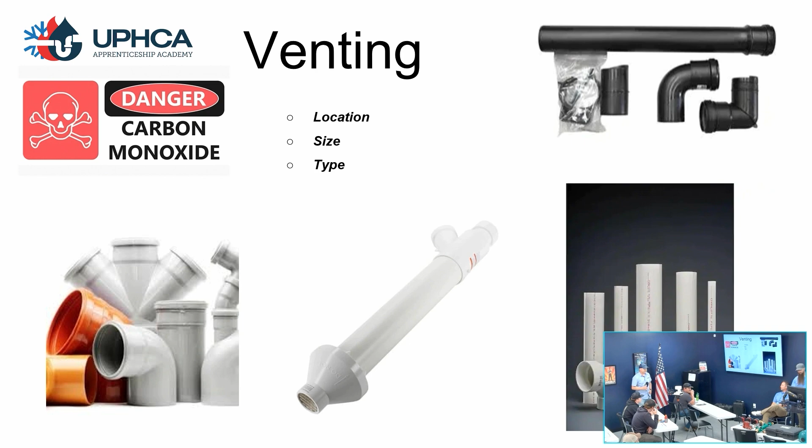Why are we venting? Show of hands. Why would we vent a boiler or furnace? Some guys in here do furnaces, right? Why do we have to vent our boilers or furnaces? Who's got it? Come on. What are we venting? Carbon monoxide. Okay. Get it out of the house. Is that good or bad? Bad. All right. So the main reason, yes, we got to get all the bad byproducts of what we're burning out of the house, right?

There's quite a few stories in the news all over the country of people passing away because of improper venting, or somebody screwed up, a fitting came apart. Somebody could have drilled through it. Somebody cut it, didn't put it back together, right? All sorts of different stuff. So people can pass away. You can cause a lot of stuff, right?

Okay. So now, where do we terminate our venting at? Because this is one I see a lot of the times that guys kind of screw up. So where do you want to usually terminate your venting at? What do you think? Use the roof if possible. Okay. Roof is the best place to go, right? Get it up and out. Most houses have chimneys on them, right? Most buildings, you get flat roofs, you want to put them up out through the roof, right?

Okay, so we're going to talk about the carbon monoxide then. Carbon monoxide is a bad byproduct of anything that's combustible. Anybody want to go sit in your garage with the car running? If you do, we're going to talk after class. We'll help you out, right? But same concept, right? You can do it with a car because you've got a combustion engine. You're creating byproducts. You're creating the carbon monoxide. You're going to hurt somebody or hurt yourself, right?

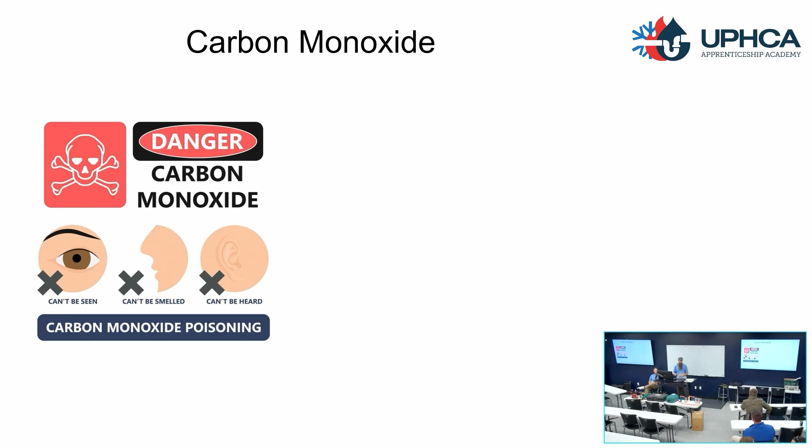So what is carbon monoxide? It's often confused with CO2, carbon dioxide, right? But it's created from incomplete combustion. Do you think our boilers can get complete combustion? Think we can get 100% out of a gas appliance? Looking around? No. Shaking some heads? No. Even though our boilers say 92%, 94, 96, whatever they say on the little tag there, we're really never going to be able to get to 100% combustion as of what we know today. So you're always going to have some sort of byproduct, something bad coming out of that combustion process, okay?

And there's a lot of different things with the condensing boilers we have today that we got to watch for, because you're always getting byproducts, right? So on the bottom of our condensing boilers, we got the P-trap that catches all of the stuff coming out of the bottom of the boiler. You ever looked at one of those traps and they're black or brown or full of stuff, right? So we're getting dust, we're getting soot from the combustible materials. You're getting the byproducts of your flue gases, and you get that condensation. Condensation is acidic, so that causes other problems that we got to deal with, right?

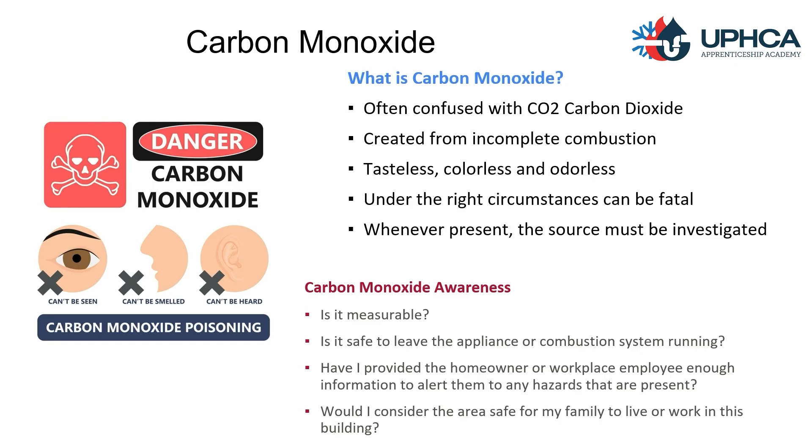Okay? All right. So obviously carbon monoxide is tasteless, it's colorless, it's odorless, right? You can't smell it, but you can feel it if you're aware of what you're feeling, right? Okay, because it will make you nauseous, it could make you lightheaded, might cause some issues that way. So small doses, it can create some issues. Okay, it can make you feel sick, give you headaches, make you nauseous, make you breathless.

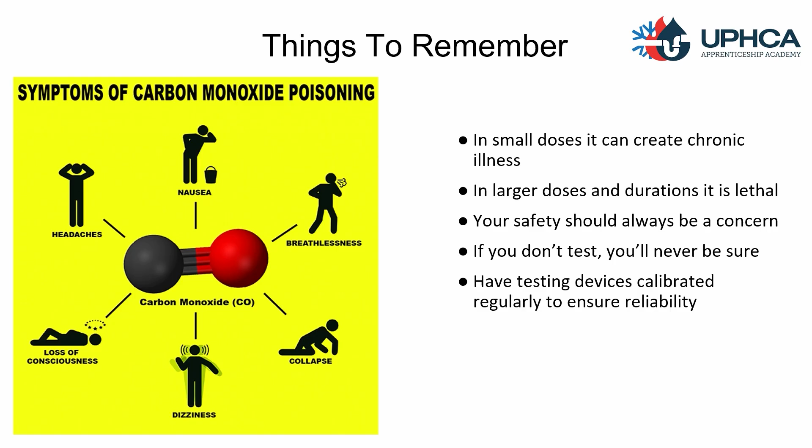But if you get long exposure to it, we all know that it could be bad. Again, if you have some symptoms, we'll talk after class, right? Okay, but it could eventually cause death, right? Can hurt somebody. So here's a chart that just kind of shows you different parts per million is how they measure it. Anybody in here have a CO detector?

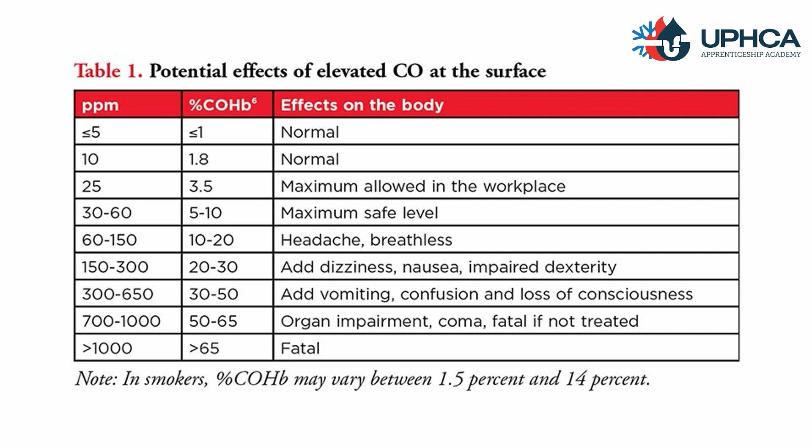Anybody use those? Okay. I got one of mine. Same thing, I got a pocket one, and then I have, who's familiar with a combustion analyzer? By show of hands, who knows those words? Okay, no? Combustion analyzer? Ever heard of that? A little bit? Okay, no? All right, we're going to talk about those too, because if you're going to be doing boilers, you kind of need a combustion analyzer. And again, another product that these guys have, and they offer a really good line of those type of products. So CO detectors, combustion analyzers, voltmeters, all sorts of good products.

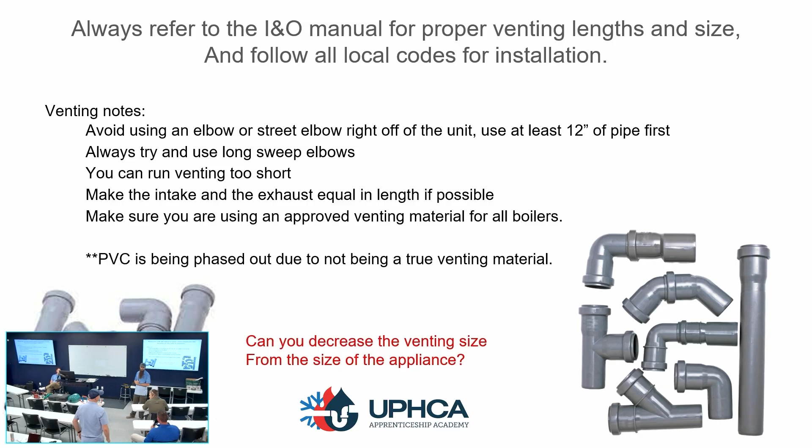So my background is legal. I was a lawyer before I started doing this. One of the first things I did when I came back to this profession was help people understand this problem with PVC. Every boiler manual out there has a section that says this is how you install PVC if you're going to put PVC in. But somewhere at the front of the manual it says you have to comply with two things: the National Fuel Gas Code and the authority having jurisdiction. The AHJ often doesn't know, but they're a governmental actor, so if somebody sues them, they're out immediately. And the National Fuel Gas Code says you can't put PVC on a Category 4 appliance.

But if a manufacturer is going to take the liability and allow you to do that, the manufacturer has to tell you how to put the PVC in. So everybody has in their manual how to put PVC into one of these appliances, just in case the AHJ or the manufacturer decides to take on the liability. But no manufacturer is taking on the liability, because they've written it out on the first page of their manual. And again, the AHJ is a governmental actor; they're out immediately. So if you put PVC into a Category 4 appliance and it fails, the liability rests with you, because all the manuals say you shouldn't do that.

Thank you. Okay. Yes, sir.

Do you know, is that the same for tankless water heaters and stuff like that too? Yep, because they're all a Category 4 type appliance. So your new power vented water heaters, furnaces, a lot of furnaces, all of that stuff now is all Category 4 appliances. So that applies to everybody.

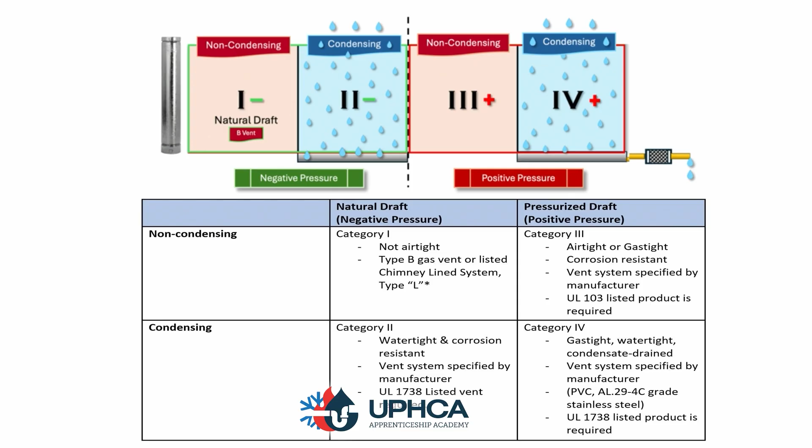All right, real quick. So category 1, 2, 3, and 4 is what Jared was bringing up. We are category 4 for the most part in the boilers you guys are doing. A lot of furnaces you guys are doing, they're all a positive draft pressure vent system now. So gas tight, water tight, condensate drained, vent system specified by manufacturer. So just a quick little chart. We won't go too much over that.

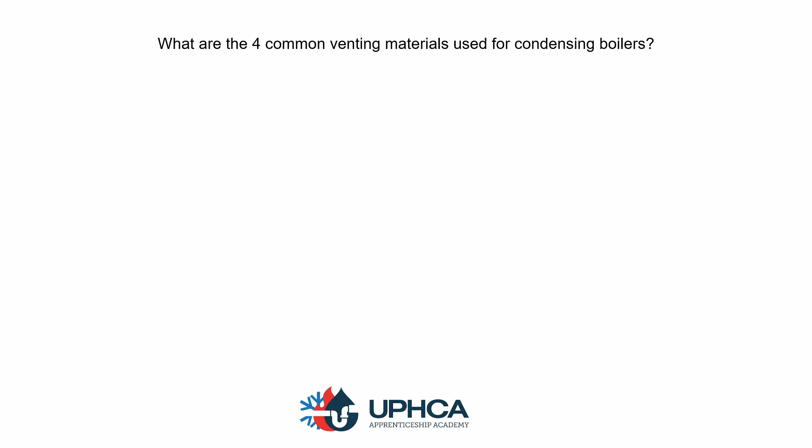All right, so what are the 4 most common materials that you use for condensing boilers or power vented water heaters or furnaces? What are the most common venting materials you guys are going to use besides PVC? What else can we use? CPVC, okay. What else? Stainless steel, and I gave you the next one.

Anybody use polypropylene in here yet? Centrotherm? A little bit? Okay. You like it? Yeah, we did a few. Okay. Is it glued together? No. It's gasketed, right? Is it light? Very light, but it's like double the cost, triple the cost of PVC. It's like, what the heck?

Okay. So polypropylene is a good system. It's easy to use. There's no glue. There's no primer. So you're not getting high while you're putting pipe together, unfortunately, right? For some of you. We like to use the glue and primer, right? It's always fun. But yeah, it's a glueless system.

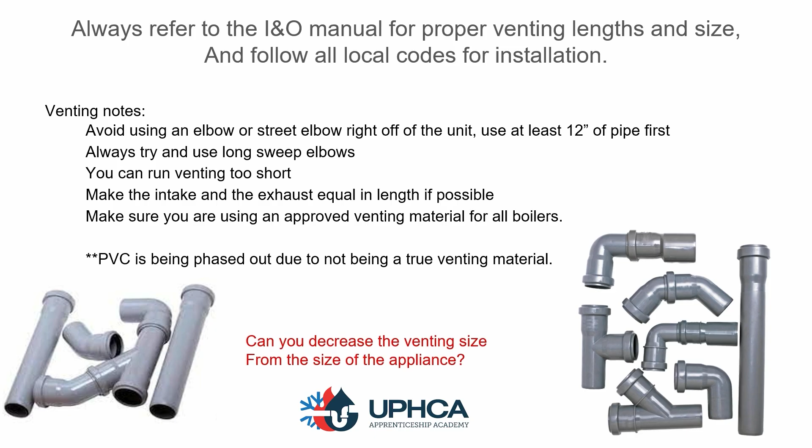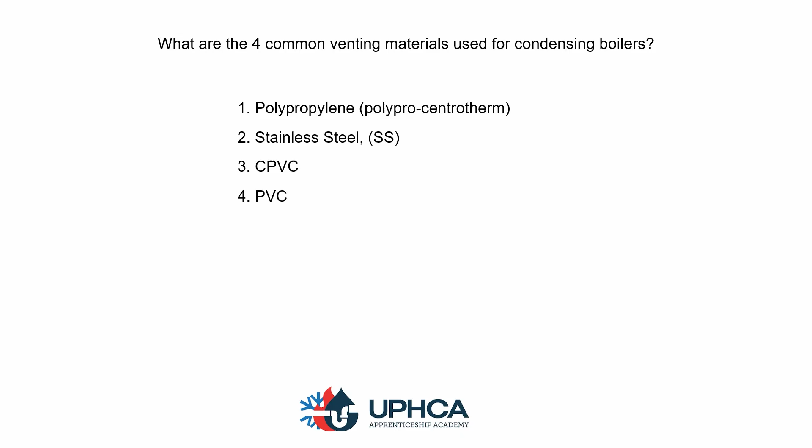It's just gasket. Depending on the gas, there is a little bit of a grease. It's not a silicone. Is it more of a silicone grease? I can't remember. But yes. Okay. So let me go back. Where's that picture at? So see the junction in the fitting? There's a gasket inside that fitting. And most systems have a lock ring that goes in place too, and it locks those together after you fit them together, okay? So you got polypropylene, stainless steel, CPVC, and we do use PVC just because everybody does right now, okay?

All right, we kind of talked about that already. What happens if we're too short or too long? So a couple pictures for you that came out of boiler manufacturers on different ways you can vent your boiler, your appliance, okay? Who likes to use the sidewall kits? Who does these guys right here? You guys like to use those ones? Now, are you doing that sidewall type kit, or do you do the bazooka type? You do both? You do a lot of sidewalls? Do you have any issues with those that you know of?

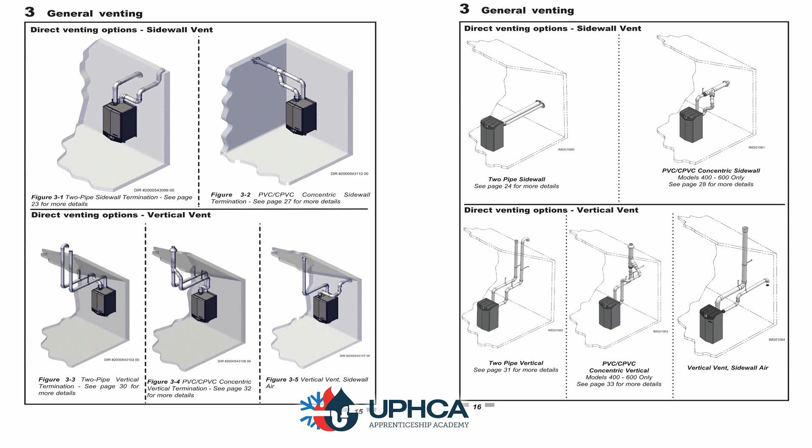Be very careful using the sidewall kits, especially these ones, the old school little oval ones, because you can get recirc really, really easy with those kits. The bazooka style is a little bit harder when you're doing sidewall. I like these ones when I go through the roof, because it makes one penetration and it's clean. The oval one? I think a lot of guys have kind of gone away from it. I know Weil-McLain used to ship those with their boilers back in the day, but I had a ton of stinking issues with those ones. So you got to be careful with those ones.

The method I prefer is either this method or this method where they both go through the roof and you separate them, okay? That's just what I prefer. You got to be careful with going one sidewall and one through the roof, though, because you get the heavy winds we've been having the last couple of weeks. If this wall is up against that wind, it's going to create that pressure difference in your boiler, and it could cause some issues. That's what I've seen in the past when we split them and do two different areas. That's when I've had that issue, okay?

Your best bet really is just to do both of them up through the roof in the same spot, but obviously you've got to have them separated. Your intake is always going to be candy caned; put bird screens in them.

I just had one two weeks ago. Guy said his boiler wouldn't light. I pulled the intake assembly off of the fan, the blower motor, and there was a dead little bird sitting in there. Okay, that stunk like it was bad too. Took me a while to clean that out.

And it was funny because I kind of consulted for the guy. He did most of the install. I built the boiler system and did the boiler room, but he ran the venting, he ran thermostat wire, he did some stuff. So I asked him, well, where did you terminate your boiler flues? And he's like, well, you just poke out the wall, he's got this little deck or something, so they come out of the eave right there. I'm like, well, did you ever put the bird screens on there that I gave you? He says, no. Well, there you go.

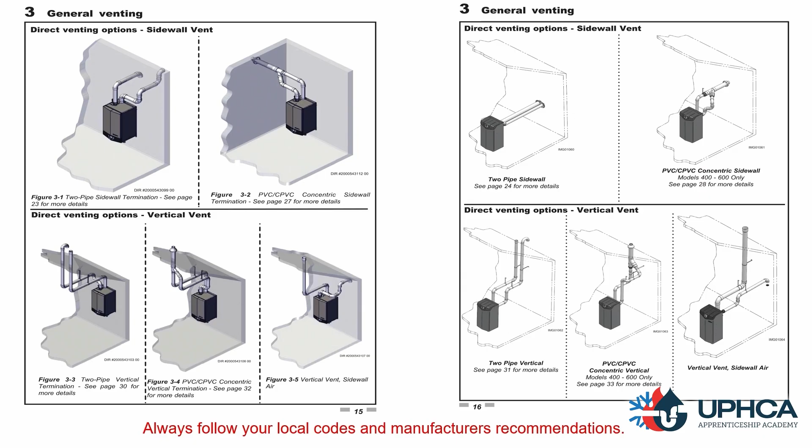All right. Always follow local codes and manufacturer recommendations. Again, like Jared was pointing out, the book is going to give you all this information, but they're also going to tell you your local codes need to be enforced as well. So make sure you guys stay up to date on those.

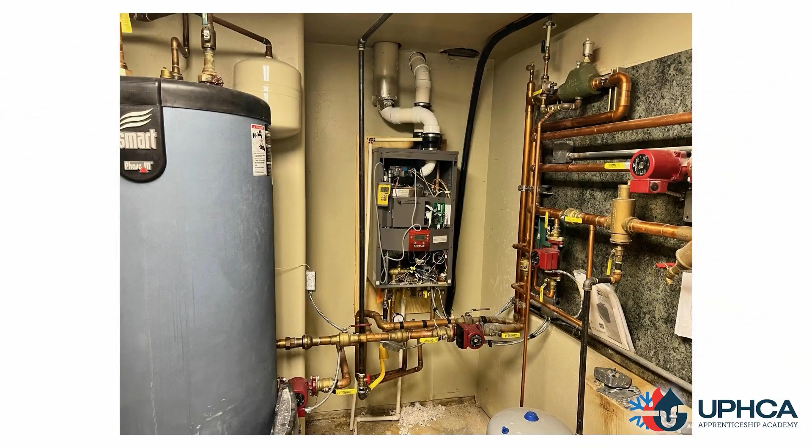What about this one? Who can point out what's wrong with this one? What do you see? The exhaust, with just silver tape on an old vent. Yep. So this guy, if you want to know who it was, I'll tell you after.

So this is another one I went on. I got a phone call. So I go walking into this one. This was a brand new boiler too. Okay, he'd only had it in for like 2 weeks. And I get a phone call, and that's what I walk into. So he replaced an old cast iron boiler, hung this one on the wall, taped it with duct tape, HVAC tape, to the old existing B vent going up and out.

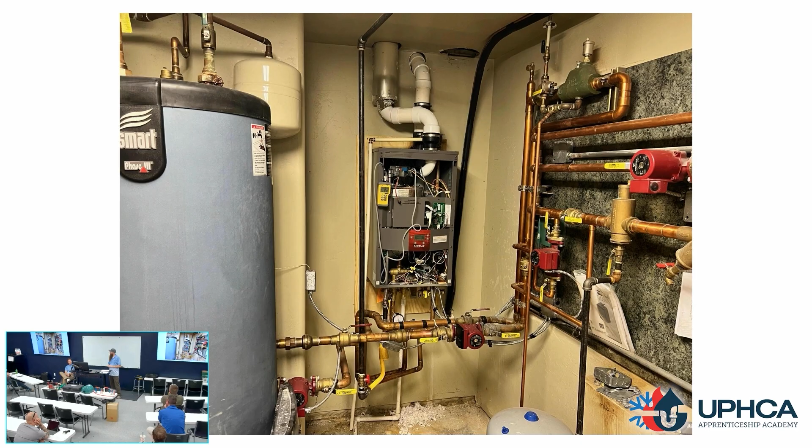Now, can B vent handle condensation, water? No. Well, it might, but it's only going to do it for a minute, right? Maybe a couple days. Okay. So he has since fixed this one, but I thought that was a great picture. Okay. All right. I think that was just the same.

Okay. What's wrong with this one? They went sidewall. That's fine, right? They put one up. What's wrong with the bottom pipe, though? Which one's the intake? Snow's starting to cover it. But you can see it probably sucking it up, right? Cold temperatures are better, right? The colder it is, the better your burner process is. Okay. So just some fun ones.

What about this one? Oh, boy. That's great, too, right? How long do you think that pipe's going to last? Okay. Now, ultimately, what is going to be the issue here? What is going to happen if we left this like this? That pipe's going to corrode and then go away. So now where is the venting going? It's going right inside the house.

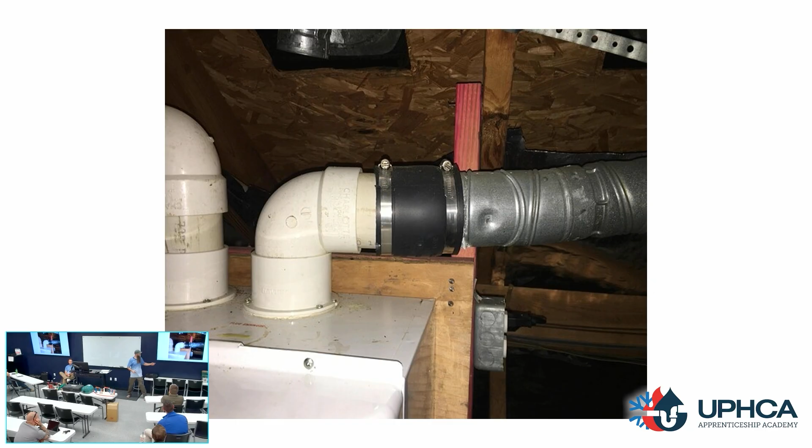Okay? So whoever installed this, do you think they had the homeowners in mind when they were putting this stuff together? Do you think it ever dawned on them that this is going to go bad pretty quickly, and they're going to get a phone call from somebody, a lawyer, and they're going to be in big trouble because somebody probably passed away because of this? Okay? So, yeah, the other thing, right off of the unit with a 90. Go back to the last slide. Right there. Okay, yeah, this was the same thing too here.

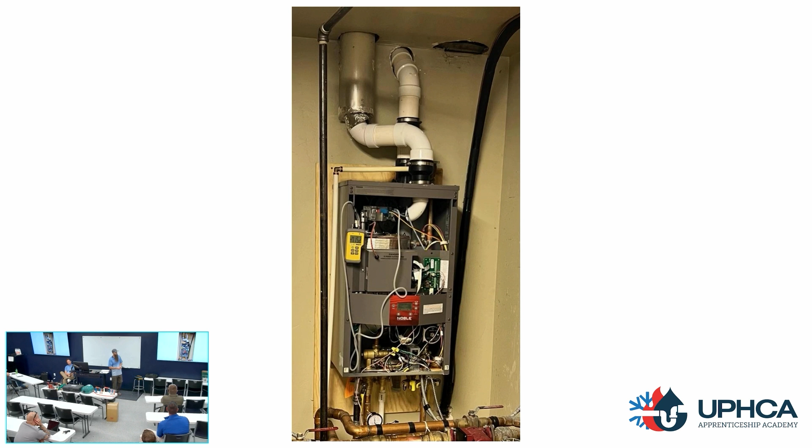Now, this one actually had a whole bunch of issues. I've actually been to this job site quite a few times, because he finally fixed the venting. What he did is he took the exhaust side of it, drilled a hole and poked it out through the sidewall. So the old original intake came down through here, okay? He just broke the pipe, and this just goes right up, and whoever did the brick mason on it, it's a chimney that goes up above that, there's slits in the chimney. Well, the problem is where he stuck the exhaust out now was right underneath those slits in the rock. So he fixed his issue, but he created another issue, and we got recirc coming back in.

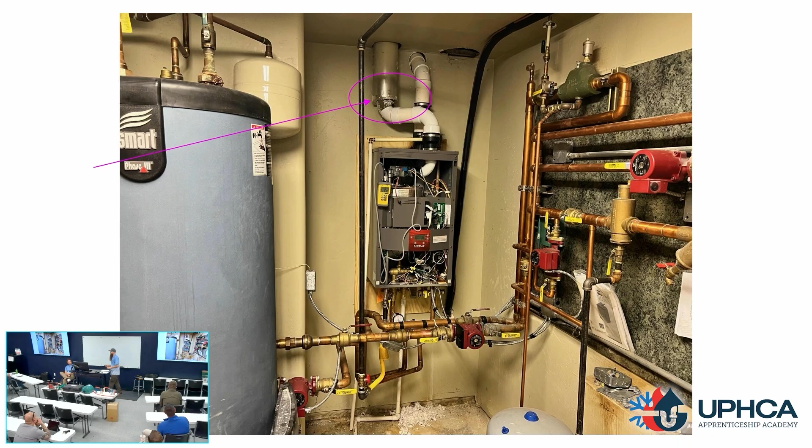So now, I need to get you an updated picture, but now we took the intake and just snorkeled it down over here and it's just in the room. Unfortunately, with that particular boiler, it's loud as hell. So his mechanical room is very noisy, but he's used to it because he had an old cast iron boiler and it was noisy too, so he doesn't care. But I walk in there and I'm like, dude, this thing is loud. Okay, but same thing. If this got left with this homeowner, it'd probably cause a lot of issues. We'd make them really sick, right?

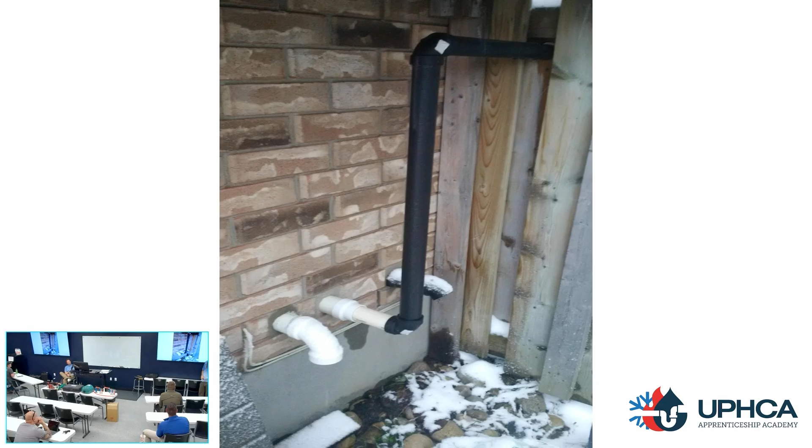Okay. What else do I got? Oh, here you go. This is a fun one too. Can we use ABS for our venting material? You used to do ABS actually, but this one is outside. So you remember McLean used to let you do ABS? So yeah, I had a couple units we used to do ABS on. Doesn't last very long. Comes apart really easy. But that one was pretty fun. So you got a couple different intakes down here, and then they must have figured out they had a recirc issue. So, well, we'll just go up and out through the fence. Right? Good times.

Oh. All right. I got to switch. Wait a minute. Where'd it go? Oh, there we go. Okay.

All right. Any questions on your venting?

Trick question. In brief, 5 minutes or whatever here or there, no, right? Okay, we can overcome that because we're probably exposed to carbon monoxide all the time, right? But if you're in a room that's leaking 30 parts per million and you're in there for a few hours, do you think something's going to happen?

Okay, so you as a technician, because sometimes I've been in a boiler room and I've been down there for 2 or 3 hours, right? Trying to service it, trying to figure out what the hell's going on with it, right? Or doing the combustion process, and I'm fighting the combustion process. I can't get the thing to dial in and get to the numbers that the manufacturer told me to set it at.